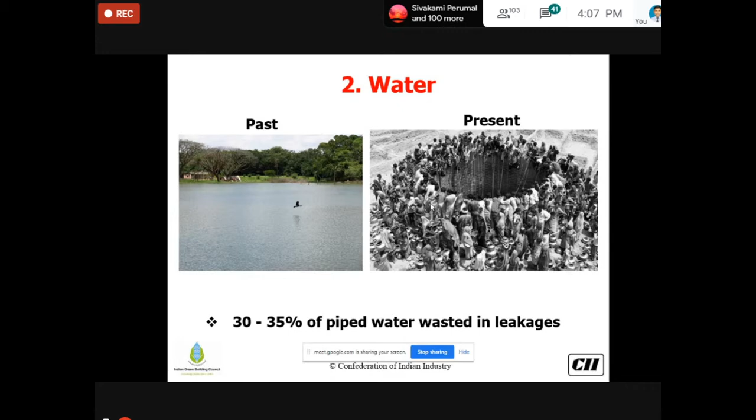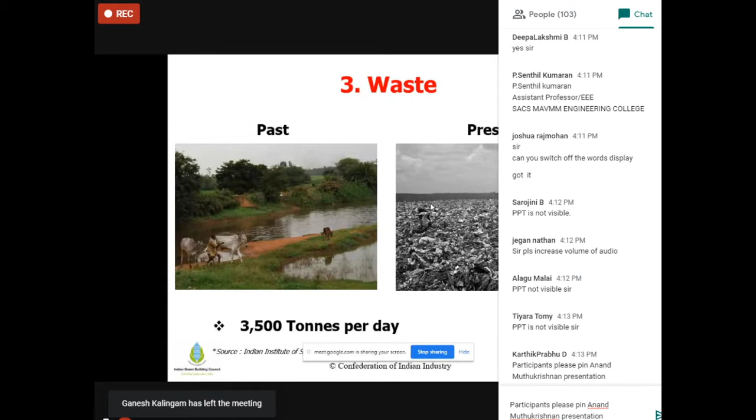Third is waste. Every city or town in India used to be very clean. If you see 100 years ago, our societies were much cleaner, much greener. But presently, I'm equally patriotic, yet from my perspective, a city like Bangalore itself generates more than 3,500 tons of waste per day. So waste handling is the biggest challenge in most cities and towns.

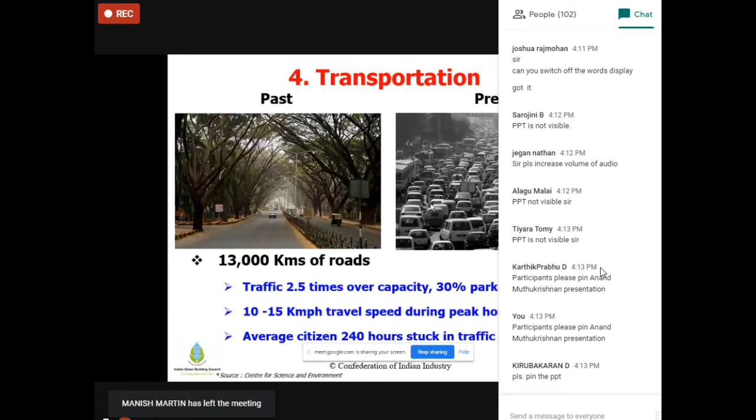Fourth challenge is transportation. We closely work with Bangalore, that's why I take it as an example. Bangalore city alone has 13,000 kilometers of road length, but many of us in a car travel at only 10 kilometers per hour - that's the speed of a bicycle. So we are traveling in a car at bicycle speed. On average, a citizen spends more than 240 plus hours stuck only in traffic jams in a year. So transportation is another biggest challenge we face.

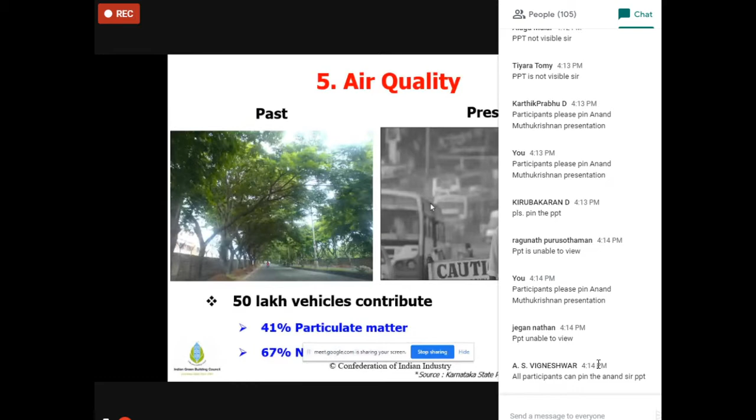Fifth is air quality. Earlier, 100 or 150 years ago, the ambient air was cleaner and greener - CO2, SOx and NOx levels were minimal within norms. Whereas if you see on the right hand side, this man has covered his nose even before COVID-19 occurred, in order to protect himself from polluted air. So these are the top 5 challenges the Indian green building sector, construction sector, or a common man faces.

And some of the other challenges as far as the building industry is concerned is there is a substantial change in the lifestyle.

Lifestyles have changed dramatically. The comfort levels, when you compare with 50 or 60 years ago to now, it is much different, and so is the affordability. Earlier, we had to wait to get a scooter. Registering 40, 50 years ago, that's what my father also did. To get a scooter, he had to wait for months together, years together. Whereas now, the affordability for a home, an office, or any appliance has become much easier.

So all this is putting a lot of demand on resources. We need more than one planet Earth's resources to meet our ever-growing demand. And already some resources are very finite in this fragile ecosystem. Our ever-growing demand makes it all the more tough for resources to sustain. So these are the few challenges.

We wanted to convert these into opportunities. That is the reason we, at CII, the Confederation of Indian Industry, an apex industry association, exist. Incidentally, this year CII is celebrating 125 years of service. We started in the year 1895. 125 years ago, the Confederation of Indian Industry was formed in order to serve the citizen and the country alike.

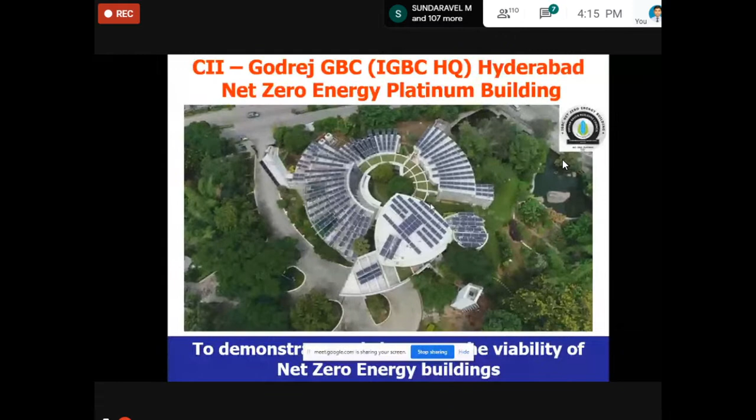What we have done is enhance the energy efficiency to the highest order so that our energy demand is the lowest. Having achieved the lowest ever energy demand required, the entire energy demand is met by the solar PVs mounted on the roof and the vertical solar PVs. So this has become a net zero energy building. Theoretically, we don't even require an electricity power connection from the grid, but due to various operational concerns, we still have an electrical connection with our grid.

So that is a brief about our own IGBC headquarters building in Hyderabad. Green buildings are not new to India. India has a rich culture, heritage, and our history dates back to, even on a conservative side, 6,000 to 7,000 years old.

Especially, I am a very big fan of places of worship. If you walk into a temple, a church, a mosque, or a gurudwara, some of these buildings, some of these places of worship, you will recognize have been constructed in the 8th and 10th century. They will stand tall forever, and they are very comfortable when you walk in, even in the middle of the afternoon, like peak summer in May or June.

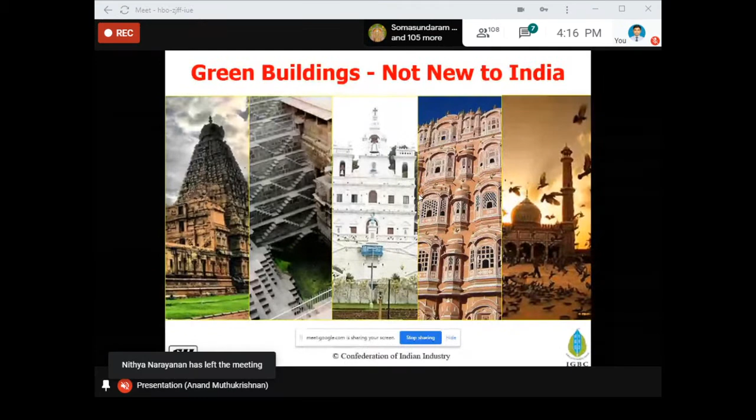So what I am trying to tell you is that India has a rich heritage, knowledge, and wisdom when it comes to green buildings also. Green buildings are not new to India at all.

So how do we define a green building? As far as IGBC is concerned, this is how our definition goes. We engage all the stakeholders involved in the construction industry, like architects, engineers, consultants, academicians, manufacturers, and the common man to define it.

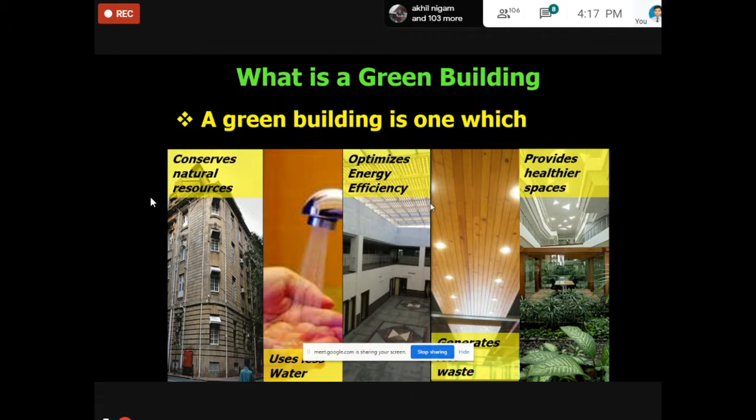As far as IGBC is concerned, a green building is the one that, number one, conserves natural resources. Number two, uses less water during construction as well as during occupancy. Number three, optimizes energy efficiency. Number four, generates less waste during construction phase as well as during occupancy phase. Last but not least, number five, provides much healthier spaces for every occupant, as well as for every living being on the planet Earth. That is how green building is defined as far as IGBC is concerned.

Put it in a nutshell, a green building as far as IGBC is concerned is a holistic and integrated approach. Like the five fingers in our palm, the green building approach of IGBC encourages: number one, site related concerns, how do we address it; number two, water efficiency; number three, energy efficiency; number four, materials; number five, indoor air quality.

That is how we approach green building design, construction, and operation in a holistic and integrated way. Site, water, energy, materials, and indoor air quality - these 5 elements are not new to India. So when we started our journey in year 2000, this was like a rediscovery of our own Indian ethos, which are again 8,000, 9,000 years old.

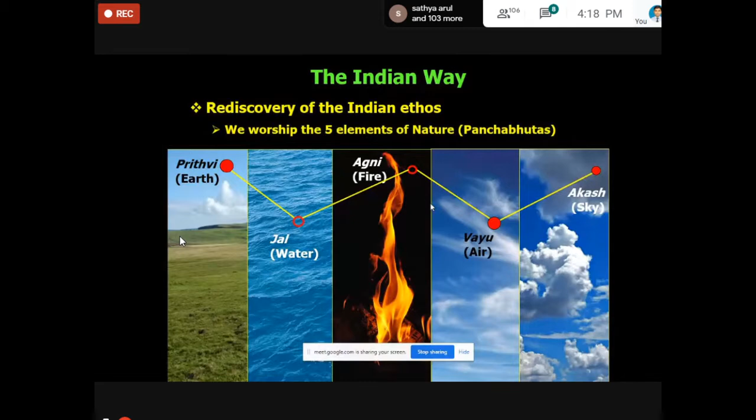The 5 elements of nature, what we call the Panchabhutas in vernacular language - spiritually, we pray to all these 5 elements of nature every single day: the earth, water, Agni the fire, Vayu the air, Akash the sky. So whatever I said earlier - site, water, energy, materials, and indoor air quality - is completely aligned with our ancient wisdom of the 5 elements of nature. That is the reason we say in IGBC, green buildings are not new to India.

Having said that, with the support of all the stakeholders, what started as one small project in year 2001 - a 20,000 square feet building, the IGBC headquarters building - has grown with the support of all stakeholders like you. Today in India we have more than 5,800 plus projects, right from Kashmir to Kanyakumari, from Kohima to Kutch on the other side, cutting across all 5 climatic zones of India, and 7 billion square feet of space is adopting IGBC's rating program.

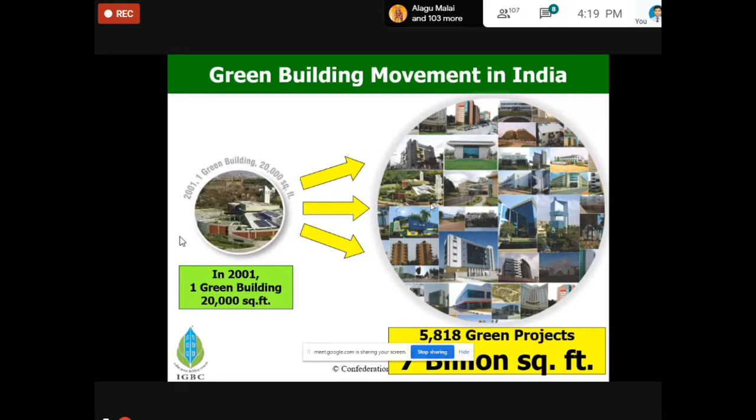I repeat, 7 billion square feet of green building spaces as we are talking today is adopting IGBC's green rating programs. So 7 billion square feet from India is a very monumental milestone. Amongst all the 70 green building councils across the world, India stands number 2. So we in India should feel proud, and the entire credit goes to all the Indian construction industry stakeholders like developers, architects, interior consultants, manufacturers, every construction workforce and the common man involved in this movement for the last 20-21 years.

So having seen what is green and what is IGBC, let us move on to the next in our agenda. What is the IGBC green rating program and why do we need a rating program?

Since we only said that India has a rich culture of 7,000 years old, we know the know-how, we have the wisdom, ancient knowledge, then why do we need a rating program? Many of us may be wondering. But we need a rating program because, number one, it defines what is a green building. Otherwise, somebody may say that if I paint the wall of my office or institution with green color paint, can I call my building a green building? Or if I use a green tinted glass in my glass building, can I call my building a green building? So though we love the color green, a green building should go beyond a color of paint or a color of glass. That is the reason we need a rating program which defines what exactly we mean by a green building.

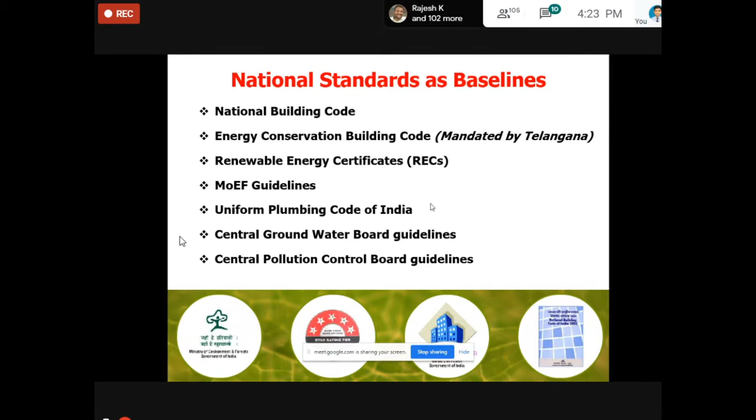Our 26 green rating systems have been developed with the support of all the stakeholders, as well as by engaging various government agencies, both at the central and state level, and nodal agencies like the National Building Code, Energy Conservation Building Codes, and the MOEF. All these codes, and the ministries and the team of these committees, are involved while developing the rating program itself.

So we in IGBC also closely work with various government agencies. For example, when we started developing the rating program for metro rails, which is the world's first metro rail rating program, it came from us. We signed an MOU with Delhi Metro Rail Corporation, and when we started developing a rating program for railway stations, we signed an MOU with the Ministry of Railways. The railway chairman as well as the members of railway boards are actively involved right from day one of developing the rating programs.

So what we do is we closely associate with various central governments as well as agencies and MOU partners like developers associations like CREDAI, Indian Institute of Architects, Indian Institute of Interior Designers, and others. So this has been holistically developed by involving all the stakeholders involved in the building sector.

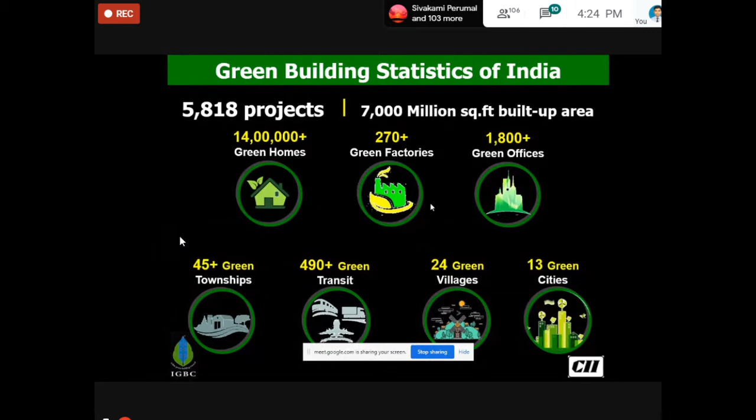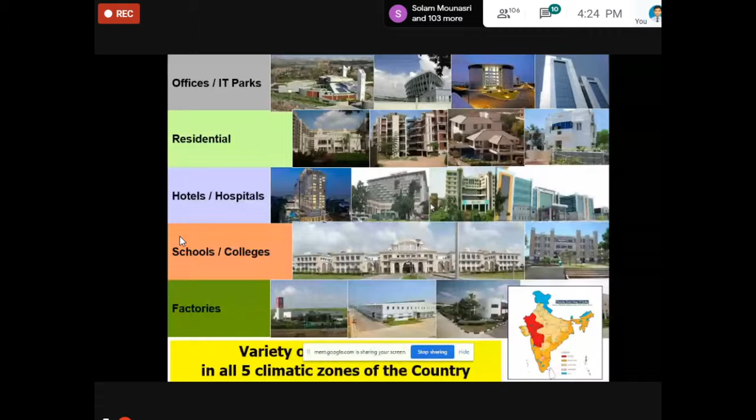So we have a rich experience of handling homes, factories, offices, townships, places of travel like airport, metro stations, and villages and cities. As I'm talking to you, more than 2,000 plus projects are operational across the 5 climatic zones across the country.

So let us come to the main element of my presentation, how we in IGBC collectively are able to address all those 5 challenges what you see in the earlier part of my presentation, how we converted those challenges to a great opportunity by incorporating innovative, futuristic, and emerging technologies in the IGBC certified green buildings. So in the next 20 minutes, I'll literally run through some of the measures which have been implemented, because the time given by our Ramco Institute of Technology is only 1 hour. For any queries, you can come back to me during the question answer or later on also.

As far as the site is concerned, we always encourage all the architects and designers and builders to protect all the flora and fauna present in a greenfield site. So we have to conceive and design a building project which is in harmony with the environment, which is in harmony with the nature.

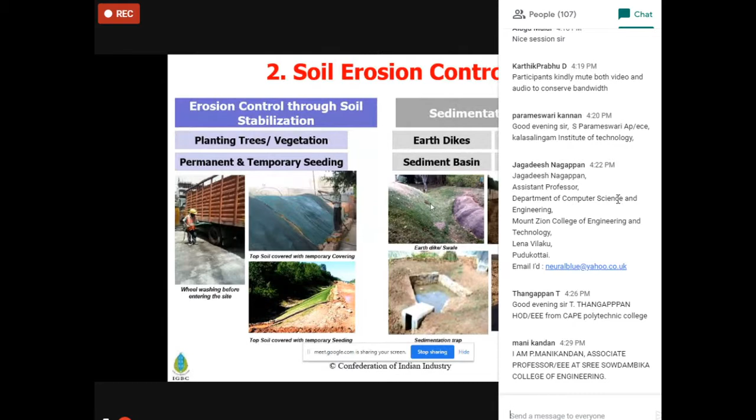So the buildings are designed in such a way that they are all built in harmony with nature. So we also wanted to protect the topsoil, the flora and the fauna. In a given commercial site, in places like Mumbai, Bangalore, Hyderabad, or even in a tier 2 or tier 3 city, it is not possible to protect all the topsoil, which takes 500-600 years to get the nutritious value. So what we do is we strip the entire topsoil to a few inches, stack it up, preserve it. Once the building construction is over, we plow it back.

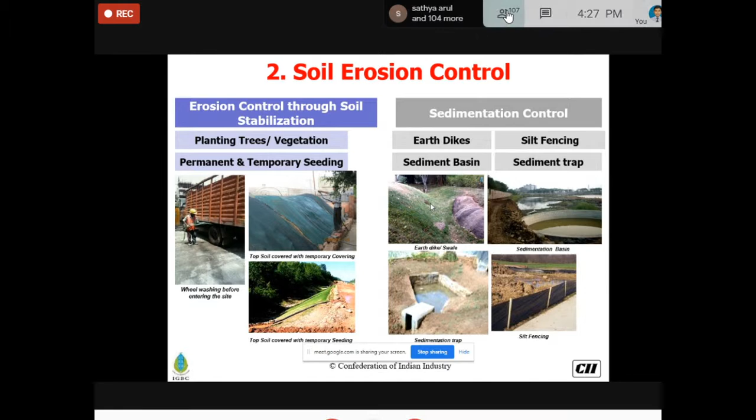There are hundreds of technologies available in order to protect the erosion of soil during the construction phase as well as during the operation phase by wind or rainwater. These are a few examples of measures we have done. There are 100 measures available for erosion control or sedimentation control, like having a swale. A swale is nothing but a kind of trench done in an eco-friendly way using the entire earth and the contours, sedimentation traps, sedimentation basins, or silt fencing, which can become part of your landscape later on. These are a few measures which are very popular and done in many of the IGBC certified projects across the country to preserve the microorganisms present in a 500-600 year old rich soil and enhance biodiversity.

So we in IGBC always believe buildings are not designed, constructed and operated only for human beings. Buildings are built and designed for further enhancing and promoting habitat and enhancing biodiversity. That is the reason we in IGBC encourage preserving existing trees if you have any, or if you don't have anything and it's a barren land, plant more trees and saplings which are native and adapted to our climatic conditions and soil conditions, so that we enhance our green cover, which in turn enhances our biodiversity.

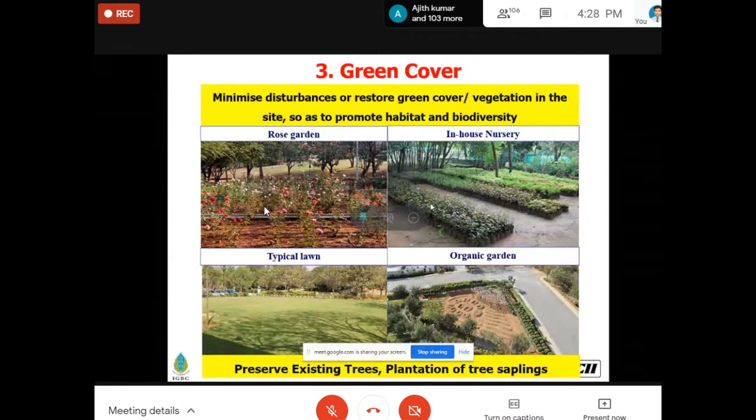The next element is on heat island effect. We are just in the middle of peak summer. Many of us are facing the brunt of the peak summer. Yesterday's Hyderabad temperature was as high as 43 degrees centigrade.

In peak summer, the temperature goes up a lot in a city. But if I go 100 kilometers away from Hyderabad to a village without much development, the temperatures are much lower in the middle of the afternoon. That is what we call the heat island effect - the difference in temperature at the same time when measured in a well-developed city compared with a village, suburb, or countryside where development is not as great.

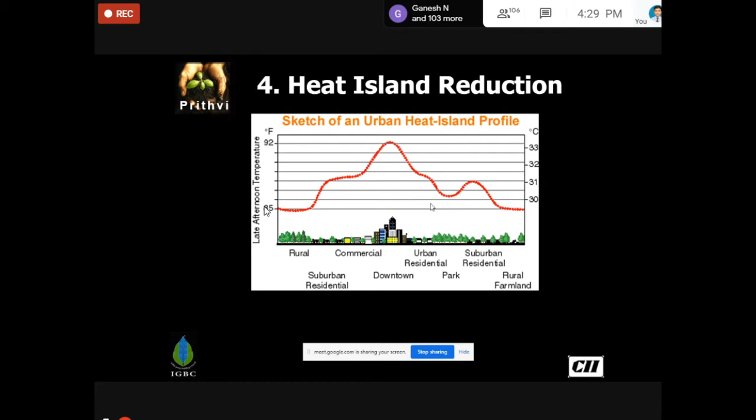This is mainly because in cities we bring in a lot of concrete and blacktop to cover our roads. We need more car parks and more roads. Tongue in cheek, I'd say cities nowadays are designed more for cars than for people. That could be one of the reasons for the rise in temperature and a higher heat island effect. How do we mitigate it?

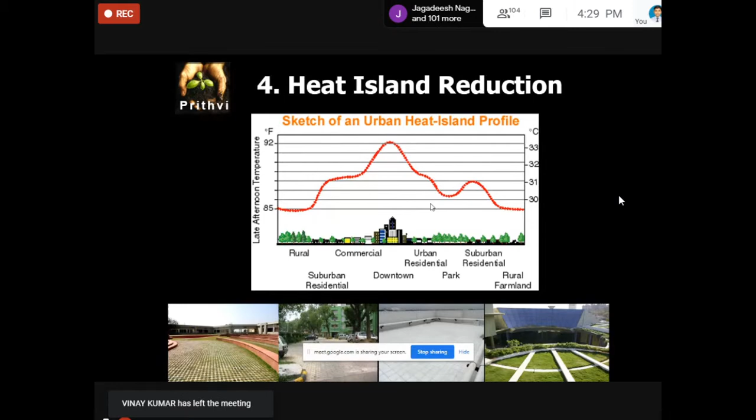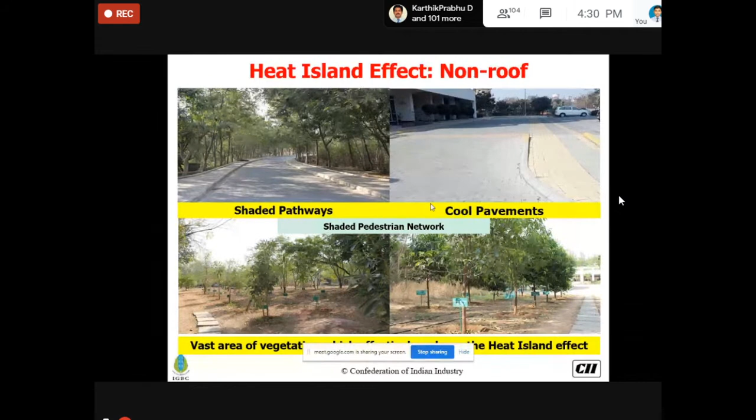There are many design and construction techniques available to mitigate the heat island effect, to bring down the microclimate temperature compared with conventional cities. Some popular measures are shaded pathways, beautiful trees with a canopy that cover the pathways, roads, or walkways so they're not exposed to harsh ambient sunlight. Also going in for cool pavements which can be painted or have a high SRI coated material, and vegetation.

These are the measures for the non-roof areas. As far as the roof is concerned, the final finish of the roof is very important for the heat island effect. Normally people used to go for China mosaic - broken China mosaics laid out on the roof, which has very high emissivity and reflectivity. Nowadays people go for high albedo painting materials, with very high reflectivity and emissivity, painted on the topmost roof surface, which won't allow heat to come into the building through the roof.

The third option is a combination - people can have a green roof as well as high SRI paints. So all three options are available. Based on the utility and functionality of the building's roof surface, you can have all three or combinations of the three.

If you still don't believe us, here is a thermography of a roof surface which has a green roof as well as a well-grown tree on the topmost roof of a building in Mumbai. If you look at the thermography closely, wherever there is greenery, the temperatures are much lower. The red color spots are the ones...

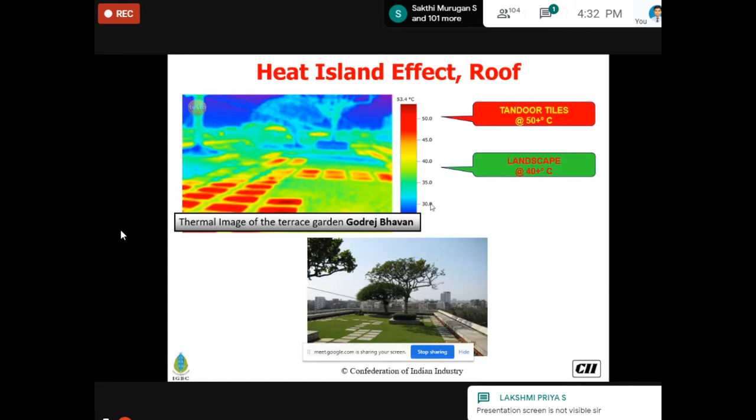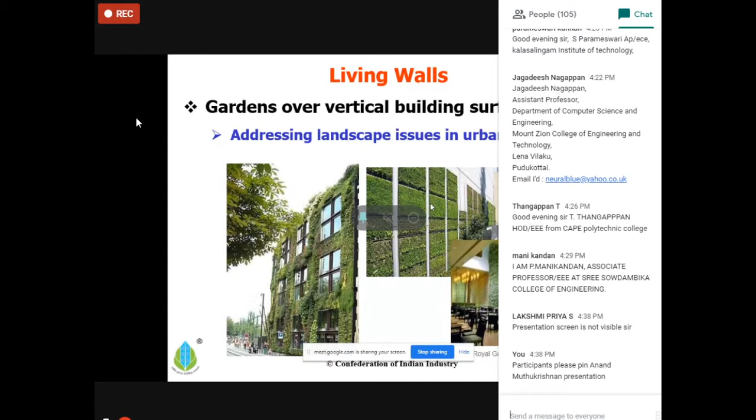Even in big cities, we don't get many surfaces for landscaping at ground level. So the only option is vertical greenery along the walls, both exterior and interior. This is becoming a big trend - these walls next to our indoor or exterior vertical surfaces are now called living walls, which mitigate the heat island effect. At the same time, they attract bees and butterflies, and bring down the microclimate temperature, giving us a much cooler space around us.

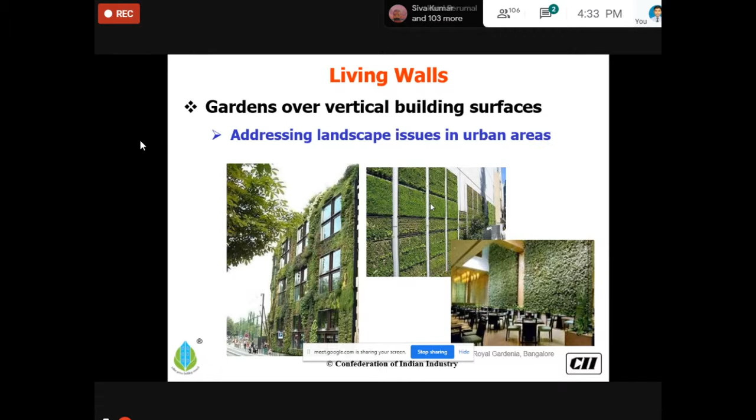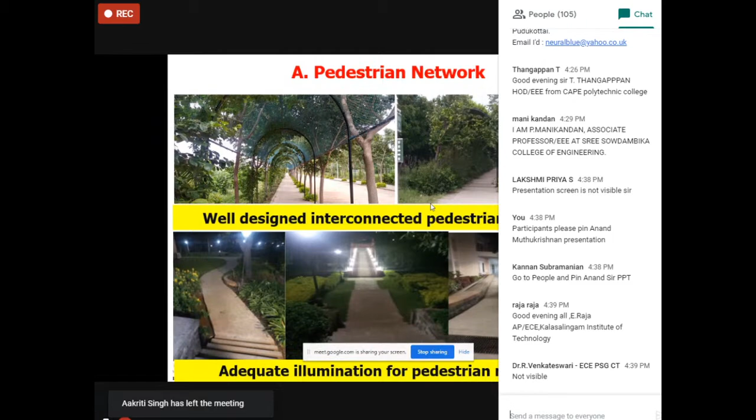Sustainable transportation is also addressed aggressively in site-related issues. I presume many of you are from academic or institutional backgrounds, where this is all the more important because your campuses run into a few hundred acres. So all the blocks are interconnected by a well-designed pedestrian network, so that I don't need to take my bike or car when moving from hostel to admin block or academic blocks.

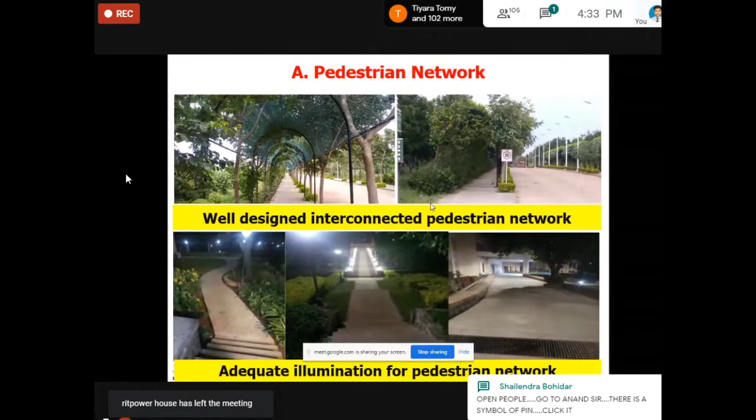So adequate illumination for this pedestrian network encourages people to use these pedestrian walks. They walk a lot within the campus, and this can be encouraged in big government projects and campuses. This is also encouraged as a part of our sustainable transportation.

We encourage this across various institutions in the country. We encourage usage of bicycles within campuses by providing an exclusive bicycle lane, so they are given priority and can have a comfortable ride.

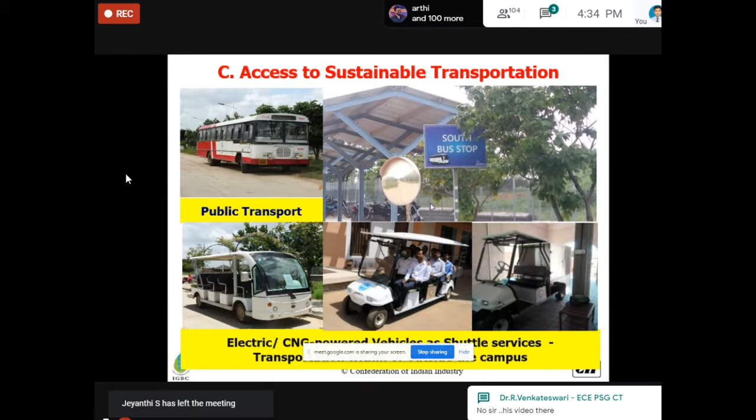Within the campus, when somebody is moving out, we also provide access to external transportation by having a shuttle to the nearest bus stops, metro stations, MMTS, or whatever public transportation services are available from our campus or office area, so that we eliminate the usage of diesel, CNG, or petrol-based fossil fuel vehicles to the lowest extent possible.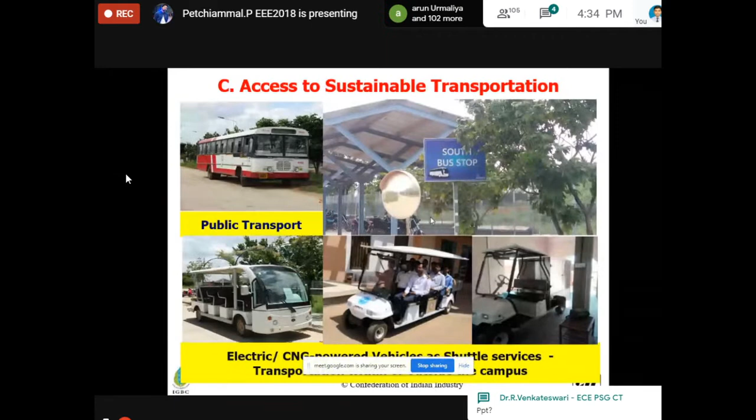Second is water efficiency. At a macro level, we have seen it at the site level. Water is the biggest challenge, as we saw in the initial slides. How do we address it? The popular 3R approach we all know - reduce, recharge, reuse - to enhance water efficiency.

IGBC has introduced the 4th R, what we call refuse. Some water fixtures don't need water at all - they refuse to have water, or don't need water during the operational phase. That's why we call it refuse.

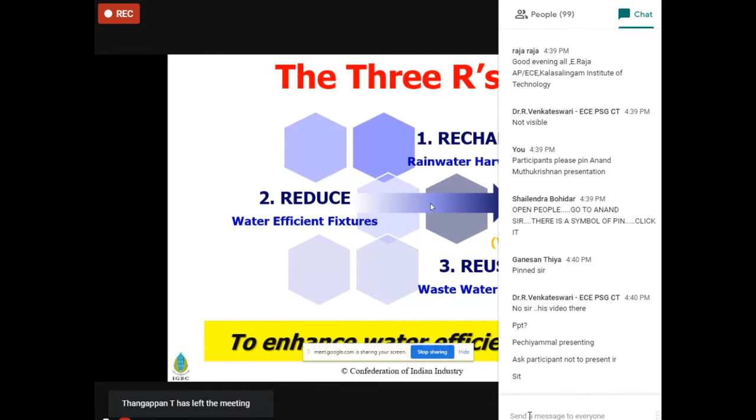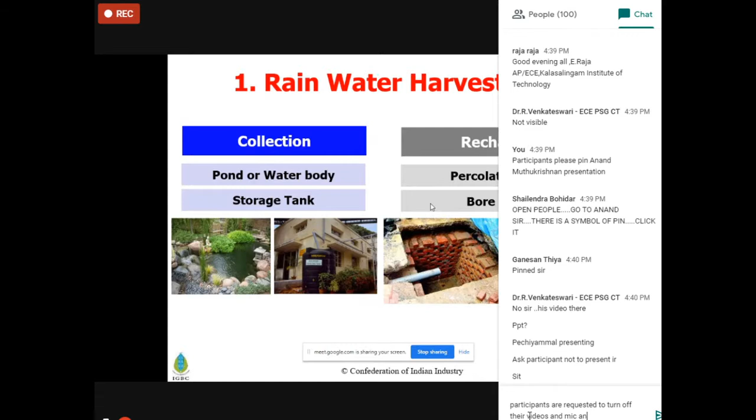God's gift is rainwater. Yesterday we had beautiful, intense showers in Hyderabad. So every droplet of water, IGBC recommends collecting whatever falls within our site through beautiful ponds, water bodies, storage tanks, wherever possible. Wherever it's not possible due to operational concerns or non-availability of space, we encourage people to go for recharge pits through percolation pits, or using old or existing bore wells.

This is a classical example of another 300-acre campus here in Hyderabad, courtesy of ISB, Indian School of Business. They have designed a very integrated rainwater harvesting system by adopting our IGBC Green Rating Program, with multiple rainwater harvesting pits followed by multiple small and big ponds. They are able to capture 100% of one day's rainfall within their site. Not even a single droplet of water overflows during the rainy season. It has been done beautifully.

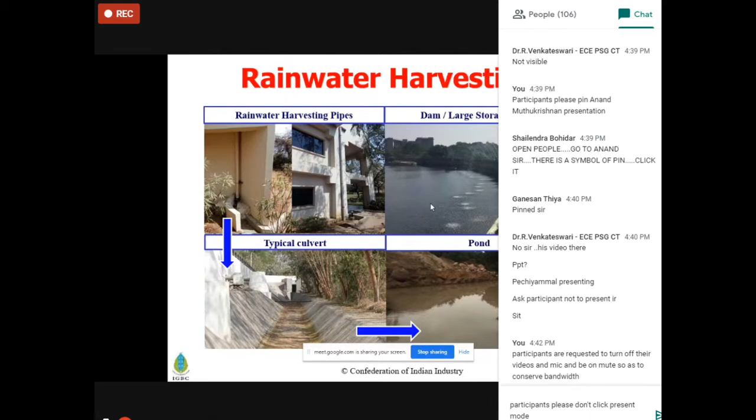These are live examples - you can see the multiple rainwater harvesting pits. Even if there is an overflow, the pits are all interconnected and connected to the smaller ponds, which are in turn connected to the larger pond, so that the rainwater is collected down to the last droplet, harvested, and not let out of the site. There are numerous classical examples across IGBC certified projects.

Second is landscape design. We closely work with the Indian Society of Landscape Architects, popularly known as ISOLA, who have given us a lot of inputs. The IGBC rating program encourages usage of native species, because I cannot take a plant from Chennai and place it in Hyderabad, since Chennai and Hyderabad climatic conditions are completely different.

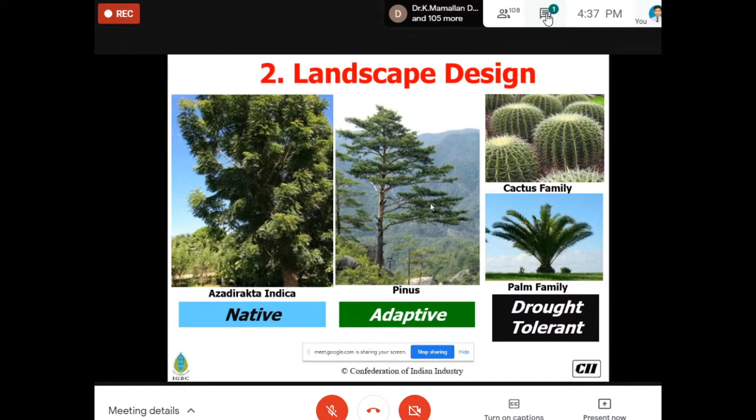Hyderabad is not close to the sea or a river, so it's less humid, whereas Chennai is right on the sea coast and is humid. The soil conditions are also different. So whatever is suitable to the native location, we should plant there. We encourage more native and naturalized plants or lawns to be planted in IGBC rated projects - they should be adaptive and drought tolerant species.

Having planted naturalized species, how do we irrigate them? We use sprinkler and drip irrigation - we want to eliminate the usage of open-ended hoses.

If I give an open-ended hose - imagine I am a gardener in your site, office, or project campus - with due respect to gardeners, I will drop it in one place, and after half an hour come and pick it up and put it on the other side. So instead of watering the plant properly, I overwater, and the entire species may die. Sometimes plants and saplings die because of overwatering, or I may wash away the entire topsoil. That is the reason we encourage a lot of usage of these systems.

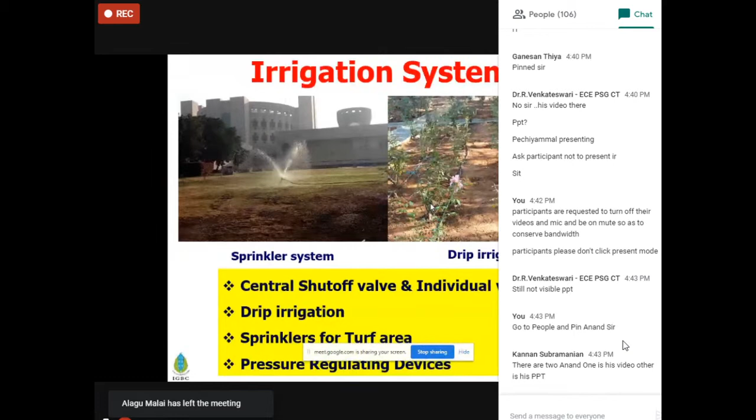They are all not so costly, and they are all available in plenty. Next is a very important element: we closely work with the Uniform Plumbing Code and other agencies in bringing down the water consumption by going in for low flow and ultra low flow fixtures.

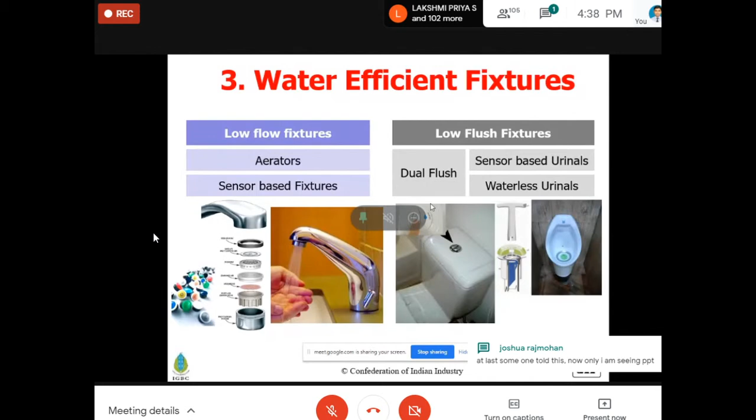Whenever you are going to buy a new tap, please check out my video if available. What I'm showing is a small aerator, which looks like a bottle cap. This will only cost us 15 rupees. The moment I put this aerator at the tip of the tap, it will reduce the water flow without compromising on comfort levels. So 15 to 40% of the water flow can be regulated using such a small aerator, which is small in size but has a very big impact on water consumption.

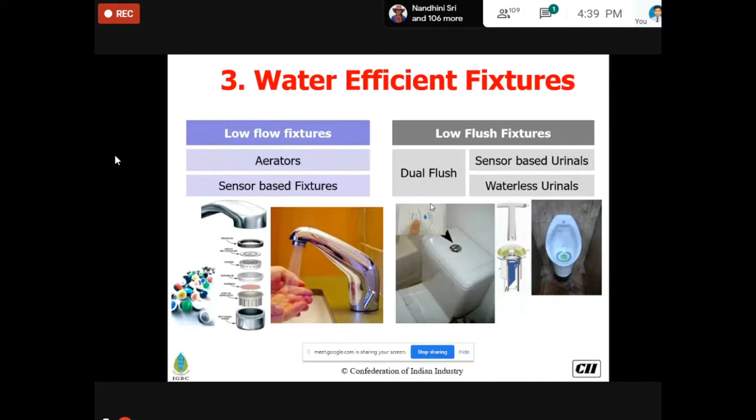So when you're talking about WCs, Western Closets, go for dual flushes - nowadays people are talking about 2 liters and 4 liters for the flushing system - and wherever possible go for waterless urinals. This is our own IGBC headquarters, where we installed India's first waterless urinal in year 2003. Still it is operational; in the last 18 years we have not faced any problem whatsoever. There is no plumbing line on top of this fixture, and it doesn't require any water at all. So that is where the fourth R comes in - it refuses the water requirement.

Having said about the water fixtures, how do we treat the wastewater generated? There are a number of ways of going for mechanical treatment, which uses a lot of chemicals and a lot of power to treat the grey water. Whereas here, the black and grey water generated in our own office, the IGBC headquarters, we treat it by a natural process called phytoremediation.

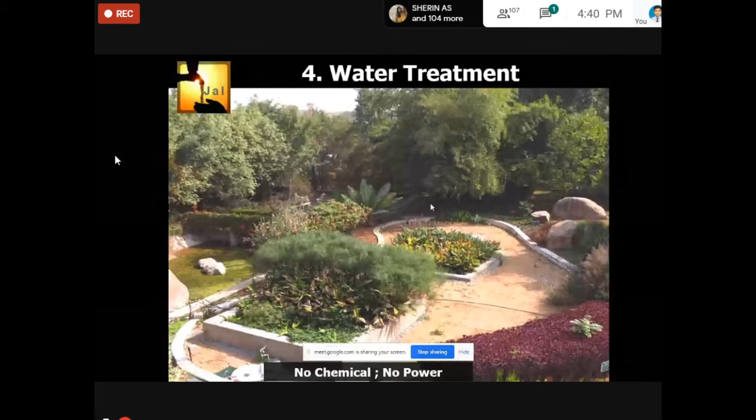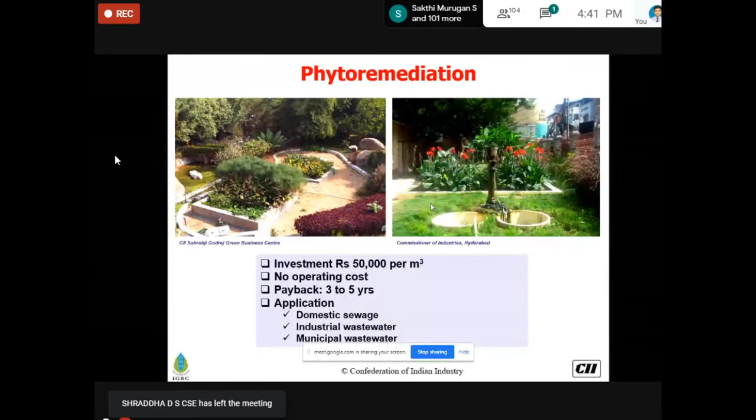So what you see is a part of the landscape. It looks like a landscape, but there is a sewage treatment plant operational below. This entire grey water is treated through the plant and becomes clear water, meeting the Pollution Control Board norms on pH value, biological oxygen demand (BOD), COD - it meets all the demand. This has been done in many projects. All you need is a good amount of space to install this phytoremediation, which is a natural way of treating the black and grey water generated in our buildings. This has been done very beautifully in one of the Chennai houses, a small house.

Next is water metering. What is being measured only can be managed; what is being measured very well only can be managed very well. So our rating program encourages installing water flow meters at strategic locations like the borewell inlet, where it is given to cooling towers, landscaping, or in a campus, hostels - which consume an enormous amount of water. Where, how do we connect it?

This has been beautifully done in many apartments in Bangalore. You see these are all water flow meters. It symbolically looks like the meter at a petrol pump, correct? That is how it has been mounted at the entrance of washrooms in these apartments. Before you enter the washroom, the meter reads, say, 100. After using the washroom in the morning for a shower, when you come out, if the meter shows 200, you consumed 100 liters to take a shower. By putting these meters at strategic locations, people become more aware and change their behavior, so they consume less water in their house, office, campus, or wherever possible. That is what measuring can do - wonders.

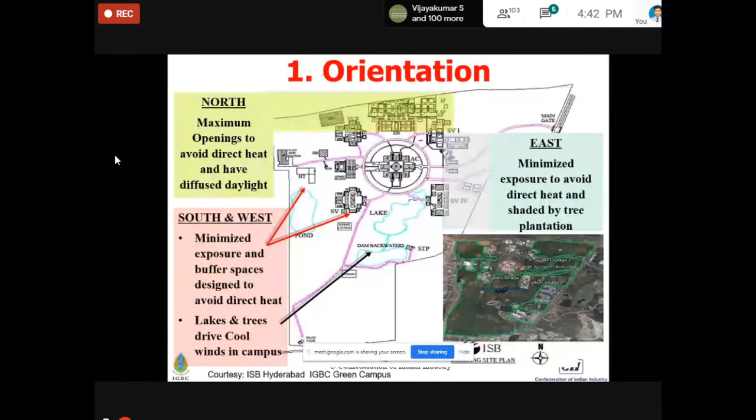Next is on energy - I'll run through this fast. Orientation of a building is very important, especially when coming up with a new building. Please give a lot of importance to orientation, because you can change the lamp or the air conditioning unit after the building is done, but orientation you cannot change. So this has to be given enormous importance. Next is going for high performance walls and roof, so that since India is a tropical country, we use air conditioning mostly for cooling, except for places north of Delhi, where they may use it for heating during winter months.

But typically, southwards of Delhi, throughout the country, we use air conditioners only for cooling purpose. So we would love to have high performance envelopes both at the wall as well as the roof, which doesn't bring excess heat into our systems.

There are n number of options available. If you are a civil engineer, you would love to have enormous amount of options with respect to the wall, the glass, and the roof insulation materials. Enormous amount of options are available.

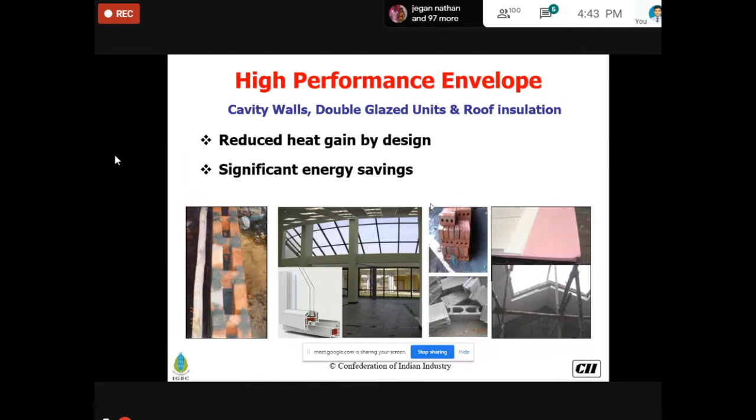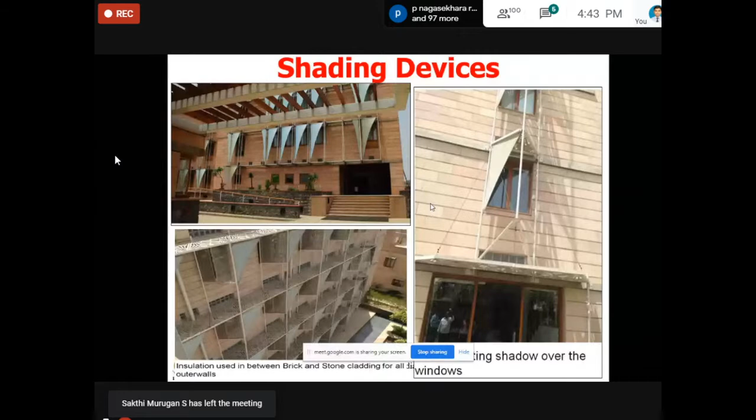Now the building designs are becoming contemporary also. They have started using lightweight fabrics in order to provide shading devices, so that the glass, windows, and doors are beautifully shaded based on the sun path analysis. Based on the sun movement, the doors and windows can be protected in such a way that it brings in light but not excessive heat into our air conditioned space through this effective usage of shading devices.

Next, our IGBC rating program encourages passive architecture elements as well as other contemporary passive cooling systems. For example, earth air tunnel, geothermal cooling, and wind towers are passive downdraft evaporative cooling systems where the wall becomes a part of your cooling system.

You will see some live examples. Here the earth tunnels are buried a few meters below the ground, a huge hume pipe. The entire air is drawn through that and filtered by having filters on the other side, so that we don't get insects or other unwanted polluted stuff before letting it into the spaces.

These are all very effective in places like Pune, Bangalore, and Dehradun.

And for radiant cooling, before pouring the concrete, red color pipes are buried along with the steel rods. Before pouring the concrete on the roof slab, the roof becomes a cool, chilled beam by carrying chilled water. So the roof above our head can become a part of the air conditioning system, and the floor below our foot acts like an underground flooring.

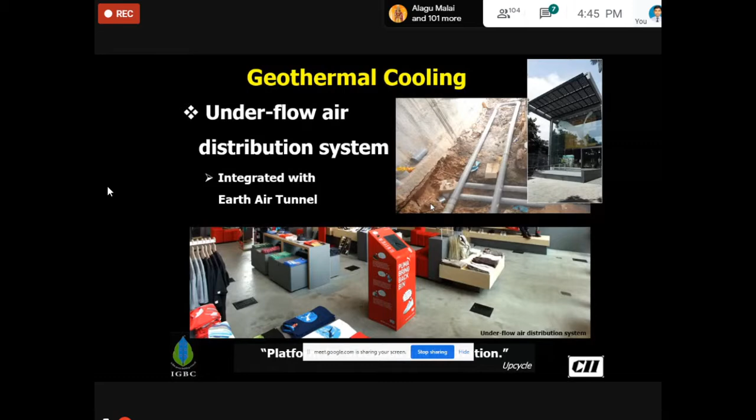The entire ducts are all underground. There is a geothermal cooling system. So your roof can act like an air conditioning system, your floor can act like an air conditioning system, and the wall can become a part of your air conditioning system.

So for lighting, if a gas can travel in a pipe, why not sunlight? This question was asked, and they came out with a very innovative pipe, which we call a sun pipe, which has a highly reflective material on the inside. By having a polycarbonate sheet on top, which brings in only the light, after multiple reflections they're able to bring the light deep inside our house.

So energy efficient equipment is being encouraged when you buy an air conditioner, a pumping system, centralized chiller system, or motors - all of them should be energy efficient systems. And how do we control, especially in campuses, you have huge lighting systems for outdoor lighting, which can be controlled very beautifully.

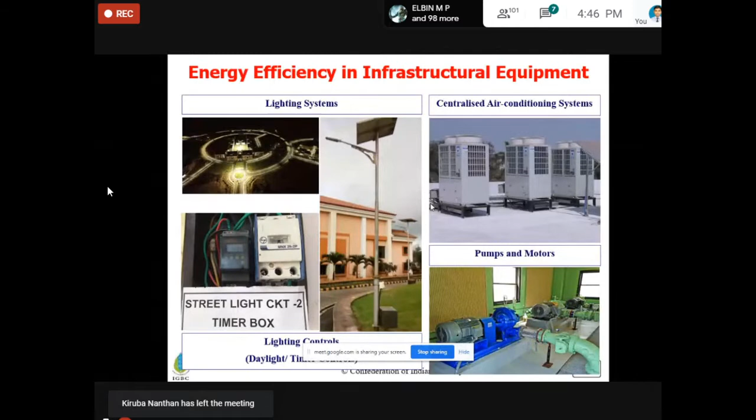And having brought down the energy demand to the lowest ever possible, we do go looking for renewable energy sources, the building integrated solar PV, the micro wind turbines, on the entire parapet walls. In many institutions and houses, they are able to have a combination of micro solar PV with a micro wind turbine.

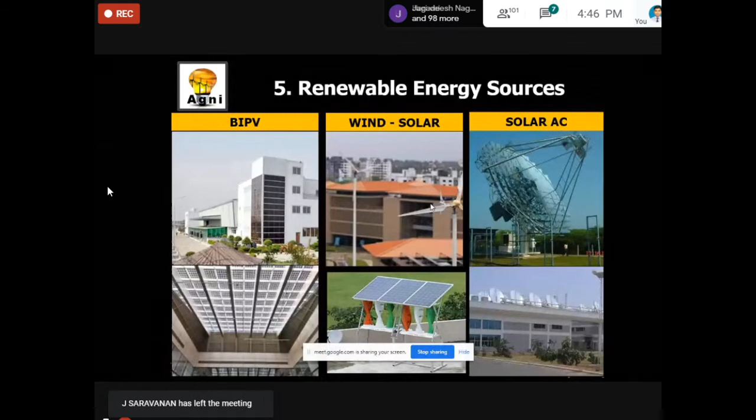You see it in our Indian flag tricolor - it has a small micro wind turbine as well as a smaller PV on top of it. So they can generate enough energy to have our entire lighting load on our individual house from the combination of these two. So energy metering, similar to water metering, we do encourage energy metering.

Fourth is on materials - the waste management. As we said, one of the biggest challenges in many cities is how do we manage the waste. That is being addressed in a very holistic way. Having collected and segregated the waste, there are n number of natural processes available to treat the waste generated, like vermicomposting, leaf composting, or wherever it is not possible, we can go for mechanical processing.

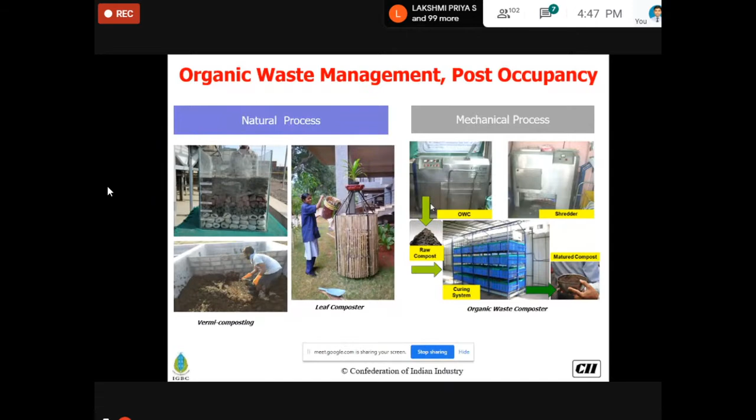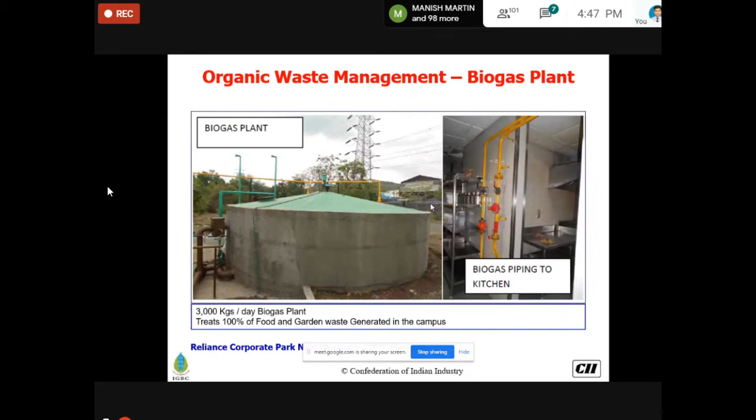In some classical examples, the segregated waste is able to generate enormous amounts of biogas. Especially if you have a huge canteen or hostel facilities in your campuses, the biogas can come back to our own canteens and replace enormous amounts of our LPG cylinders.

And how do we handle waste during construction? That is also encouraged during a construction phase - we can segregate the waste in a much better way.

Select an eco-friendly material. How will I know it is an eco-friendly material? Here, for example, a railway sleeper is being used. The old railway sleepers, which are all 150 years old, are used as an envelope on a new building. They didn't stop there.

The pine wood which comes as a container, after it carries materials, was all dumped earlier as waste. Whereas the waste pine containers or small cotton boxes made out of pine wood are all converted into modular furniture in a multinational office in India. Can you believe it? They are also converted into false ceiling tiles.

So there is nothing called waste in the Indian philosophy. What I consider as waste becomes a food or a resource for somebody else. So that's what we call waste becomes a resource.

We encourage usage of recycled material. Whenever you buy any cement, please check out the recycled content. Whenever you buy a block, steel, or furniture, they all have a recycled content.

For example, the pencil which I'm holding is made out of a plastic, which is made out of CD. The old CDs are all processed so that we don't cut trees from the forest. Earlier, the pencils were all made out of only wood.

So when a small consumer item like a pencil can go green, why not a civil or construction building material? That is the reason we have launched a service called GreenPro.

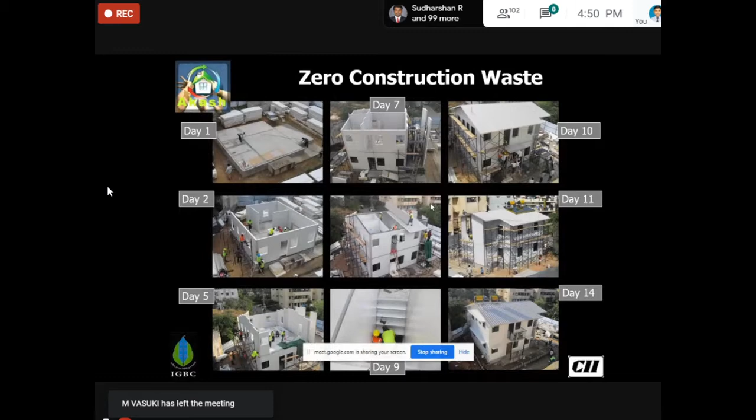On the 14th day they had the housewarming session, and the beauty is they did not generate even 1 milligram of waste in the construction process. It is all pre-engineered and fabricated at site.

So the 5th one is on indoor environmental quality. Nowadays we are spending most of our time indoors, especially for the last 2 months, we are all spending our time at home indoors. So the health and well-being of us is decided by what kind of air quality I inhale. The quality of air which I inhale is going to decide the quality of my life.

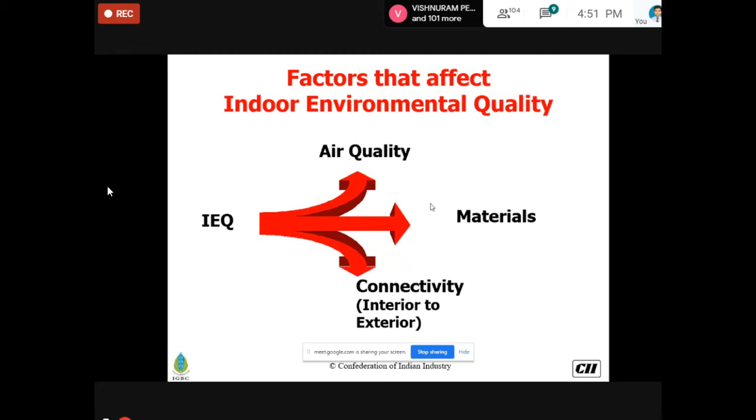So next is the materials we use, the kind of paint, the carpets, the adhesives and sealants. Third is the connectivity of my house or office to the external world. So these are the top 3 parameters which ensure a better indoor environmental quality.

So we do encourage naturally ventilated spaces wherever the occupancy is big. For example, in our classrooms in our institutions, we put 60-70 people in a classroom. So obviously many times we may go for air conditioners in seminar halls or our call centers.

So whenever there are mechanical air conditioning systems, you go in for a treated fresh air unit which brings an enormous amount of fresh air to every employee. So that is being encouraged.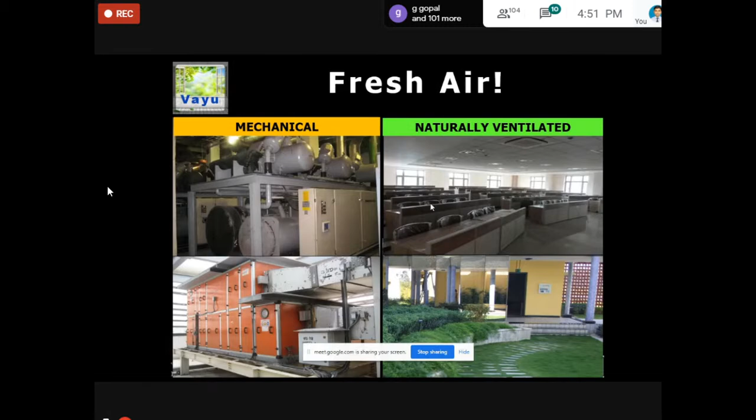So not only do we encourage energy friendly, environment friendly products, IGBC encourages people friendly products like paints, carpets and composite wood. As I said, please look for Green Pro certified products which are all people friendly.

For example, whenever we paint a house using a conventional paint, the next day you will not be able to walk into the house, because conventional paints may have excessive volatile organic compound, popularly known as VOC.

VOC stands for volatile organic compound, present in conventional paints. Some of the green paints or Green Pro certified paints have an absolute 0 VOC content, because even a measuring device is not able to detect the minimum quantity of VOC level in the paints. So this is what we call 0 VOC paints, which are people friendly.

The daylight has a greater impact on health benefits. Vitamin D is deficient in India, which is very ironic since the only source for vitamin D is natural sunlight, and sunlight is available in abundance in India for 365 days. When my skin is not exposed to sunlight, I get into vitamin D deficiency. So by bringing in daylight and having occupants walking around, we have a great opportunity to bring in more daylight and views.

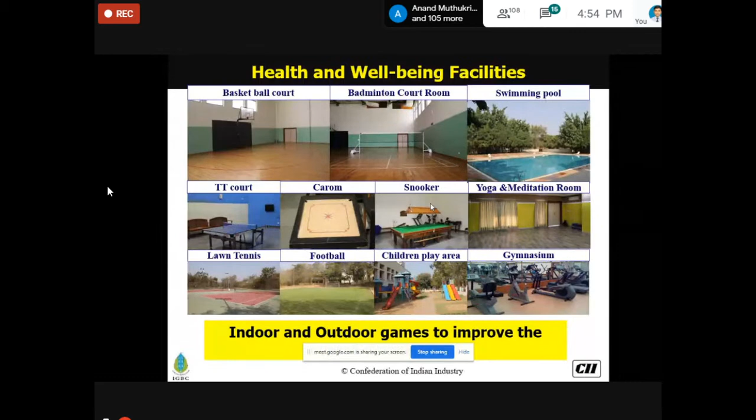And lastly, we encourage people to be healthier and happier, so we need health and well-being facilities. The key word in IGBC for the last 3 years is health and well-being, and now hygiene is also getting added with the COVID scenario. So health, hygiene and well-being is being encouraged by the IGBC rating program.

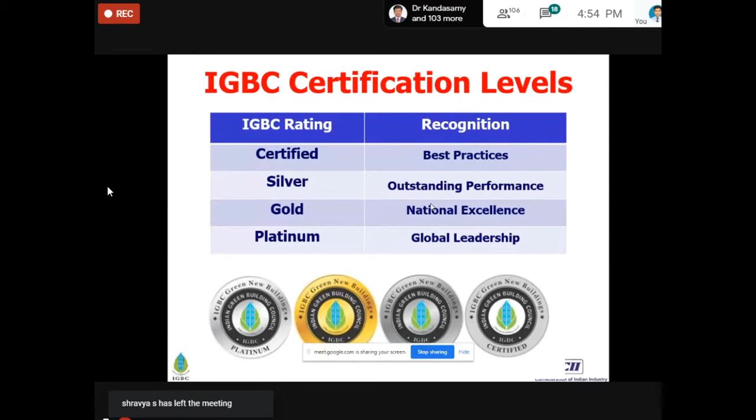So these are all measurable benefits. Based on these elements and features, every project is rated at 4 levels. The highest level is platinum, for achieving global leadership in incorporating many green features. Next, gold is for national excellence. Third is silver, for outstanding performance. Certified is for best practices. So platinum, gold, silver, and certified are the certification levels offered by IGBC.

By adopting the IGBC rating program, you may wonder what you will get. For example, in 1 million square feet of office space, they are able to reduce 15,000 megawatt hours worth of electrical energy, and save water to the tune of 40,000 to 45,000 kiloliters in an IGBC certified office space.

So the water and energy saved bring down our water bill and energy bill, so the operational cost of my green building comes down drastically. And the water and energy saved is available for my own countrymen, which also reduces global greenhouse gas or CO2 emissions to the tune of 12,000 tons per million square feet.

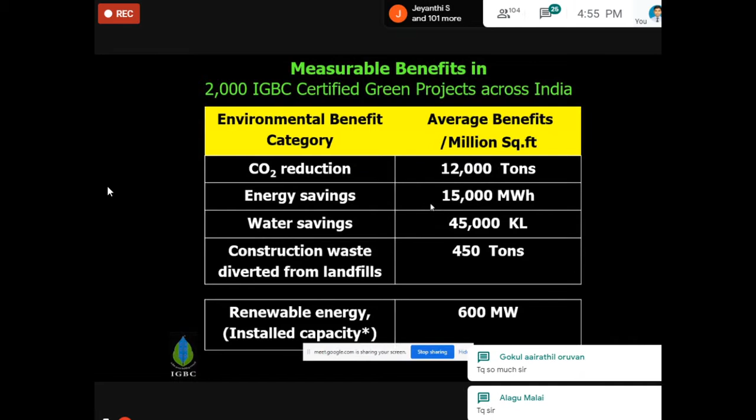And we are also able to divert construction waste from reaching the landfill, and bring in 600 megawatts of renewable energy sources.

So IGBC green rating programs, as seen in my earlier presentation, are simple in terms of understanding and approach, but very demanding in terms of performance from architects, developers, engineers, consultants, and end users. It has a profound impact on the environment, as it saves enormous energy, consumes less water, and brings enormous value to every participant and occupant in the office.

All 26 IGBC rating programs have become national by choice and global in performance. When you adopt the IGBC rating program for your office building, home, or campus, you can proudly say you have a truly world-class institution by adopting IGBC standards.

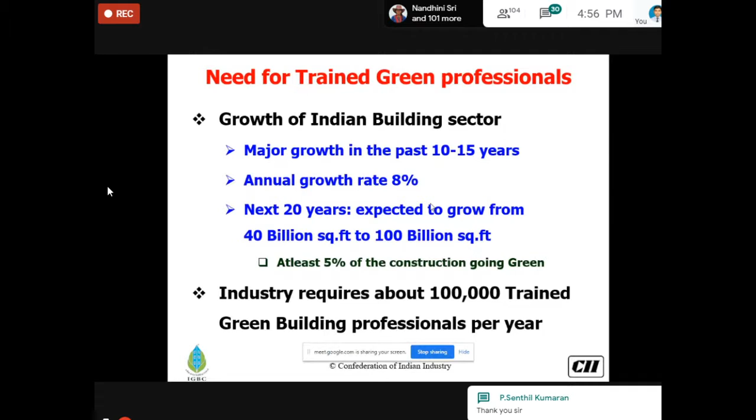We also run a program called IGBC Green Education. Because of want of time, I'll run through it. The Indian green building sector is growing in leaps and bounds, and we need more than 100,000 trained green building professionals every year. That's why we have a unique program for green professionals, where all faculty members and students, especially faculty, are encouraged to become IGBC accredited professionals, popularly known as IGBC AP.

AP stands for accredited professional. For students, we have a bigger vision: there is a classroom program for a 45-hour certification course which we run, and we also run a train-the-trainer faculty program. So there are key benefits for students, and we at IGBC will be more than happy to join hands with you all in the green education program.

What began in India 20 years ago, by constructing the IGBC headquarters as the world's greenest building, kickstarted the 21st century modern green building movement, with the support of all the stakeholders. It has become a movement by itself, and when I say movement, it has a greater impact on every citizen of planet Earth.

It has a bigger benefit for each and every citizen of our country. 7 billion square feet have adopted our IGBC rating program. This has become a big movement by itself, and it belongs to each one of you - the students, the faculty members, academicians, the government, developers, architects, engineers, designers - each one of you belongs to this movement. Because of you only, we in India were able to showcase that 7 billion square feet is possible in less than 17 years.

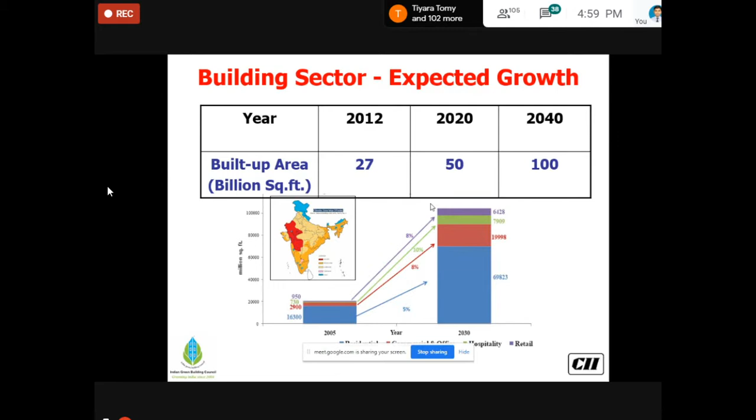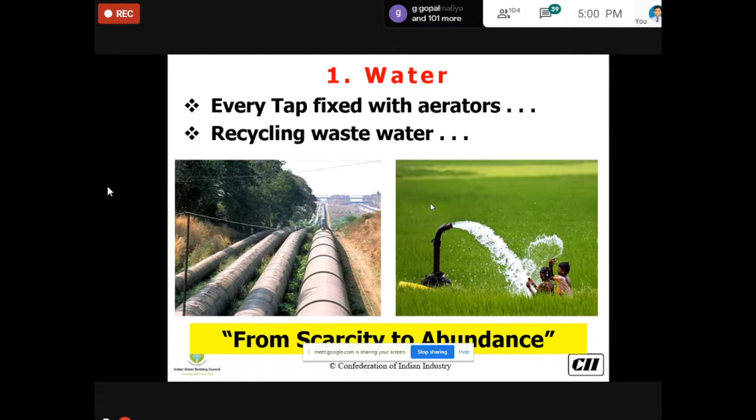As I told you, by installing a small aerator - a small piece in the tip of the tap - we'll be able to save an enormous amount of water. Imagine every tap in India overnight has an aerator; there won't be any scarcity at all. These are just a few measures. By doing all these measures collectively, we will be talking about availability of water in abundance in India.

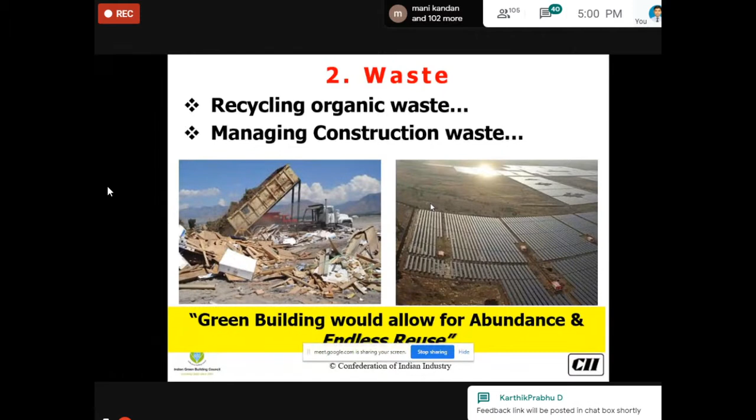Next, we said waste handling is a challenge. When you harness the true potential in handling waste in a much better way, the green building through the IGBC rating program allows all of us to use abundance and endless reuse. You saw that railway sleeper getting used as a facade in a modern building, and it can be used again and again using various technologies. Endless reuse and upcycling is encouraged by the IGBC rating program, so waste handling is no more seen as a challenge - there is great potential, and together we can harness handling waste in a much better way for the betterment of all.

So by encouraging use of public transport, we will be able to save an enormous amount of resources, and our Mother Earth, or nature, can heal and recover to its best. Fourth is on energy and renewable energies.

By using energy efficient green building equipment, technology, and systems as a whole, in order to bring down the energy demand to the lowest possible, then topping it up so the entire energy demand is met by renewable energy sources, will ensure that even if we add another 50 million square feet in the next 40 years, the energy demand is going to grow, but it can be met with the least emissions by going green. So energy would be available in abundance. That is the kind of true potential available.

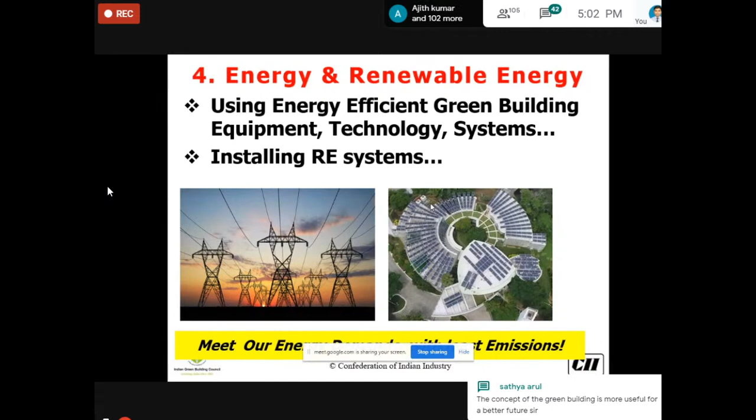For example, imagine a scenario. The entire 250,000 megawatt installed capacity of power plants in India - if everything had to come from solar panels, people may say there is no space in India. But all we need is 5% of India's land mass, which is almost 3.6 million square feet. 5% of the land mass can generate all the required energy which currently comes from 250,000 megawatts of power plants.

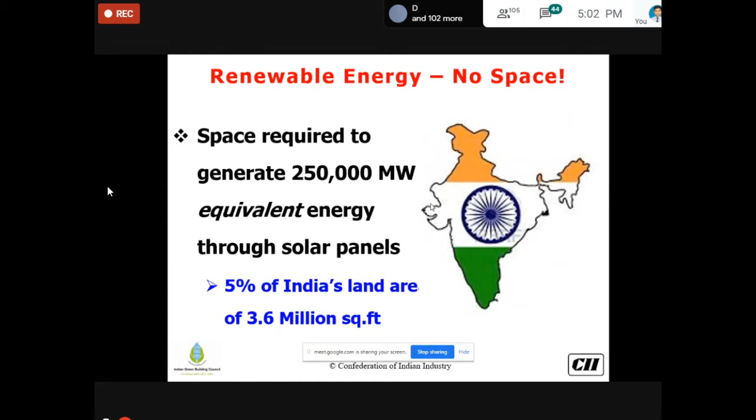So for renewable energy, space is not a constraint. It is all about the change in our perspectives, perceptions, and mindset. Once it changes, we can harness the true potential, and the urban ecosystem is changing it.

Some of the cities have gone flat, horizontal. They've grown and expanded horizontally. That is the reason for traffic jams and resource strain, and even the loss of water bodies in some cities. For example, Bangalore had thousands of water bodies 100 years ago. Now we have lost many of them, as per a recent study done by IISc.

So the urban ecosystem, by growing green with IGBC, will become compact, and by having sustainable transportation models, we can harness every single potential available in order to make the world a better place to live in. So each one of us listening to this webinar, by joining hands with the Indian Green Building Council, can collaborate much closer than ever before.

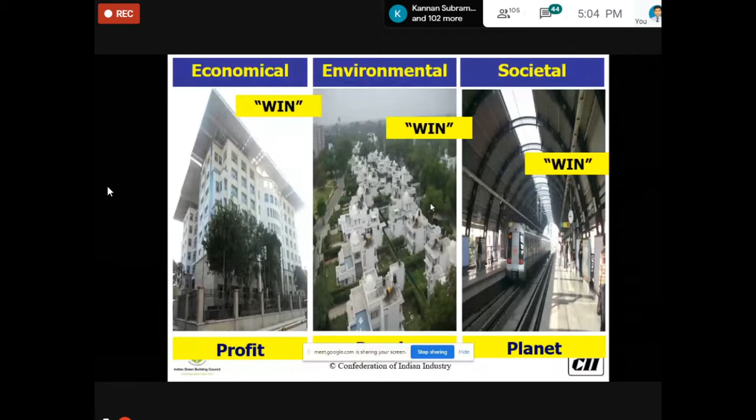The lockdown and COVID have brought in a lot of challenges. We can work more together in order to make a greener, healthier, and happier India, so that while harnessing the true potential through adopting our IGBC rating program, there is an economical benefit for the end user - profits will go up. There is an environmental benefit for everybody involved, and a societal benefit for the people and the planet. So there is a win-win situation for economy, environment, and society at large.

So by harnessing the potential offered by green buildings in the built environment, India is witnessing huge tectonic changes in the way designs are being approached - the materials and equipment usage is seeing a sea change, as are the technologies.

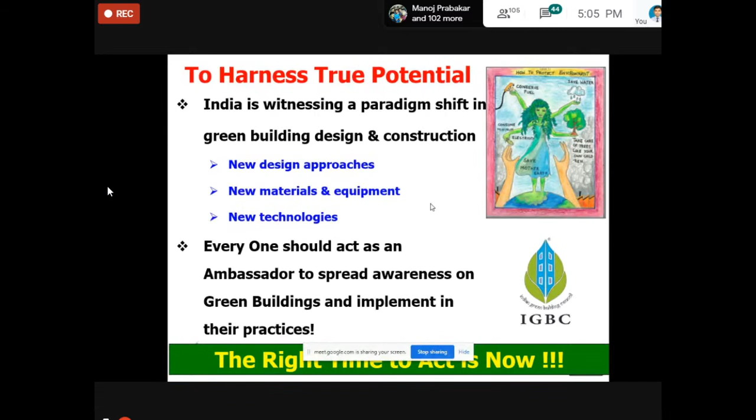So everyone listening to this webinar - we at IGBC humbly request you to become an ambassador to spread awareness on green buildings and implement green building elements. What you see are all very simple, doable practices, and the time to act is now. We don't have any time at all. The time to act, to harness the true potential, is now. You can join hands with IGBC.

So to sum it up, ladies and gentlemen, as you heard from IGBC's presentation, India offers a huge potential to harness natural resources, finite and infinite, in a much better way. There are huge, tremendous benefits for society and the nation at large.

It also instills in citizens and participants like you, when you go the greener way with IGBC, a sense of pride - that you have done something unique so the country can progress in a much better way, and it also brings a sense of contribution towards society. More importantly, whatever you are doing, small or big, by joining hands with IGBC, it enhances the quality of life of every living being on planet Earth.

So our father of the nation, Mahatma Gandhi ji, said there are enough resources on earth for everybody's need, but not for everybody's greed. So even as we add more buildings to meet our growth - and we have to grow, we have to add more buildings - by going green with the IGBC way, we will be able to handle resources in a much better way.